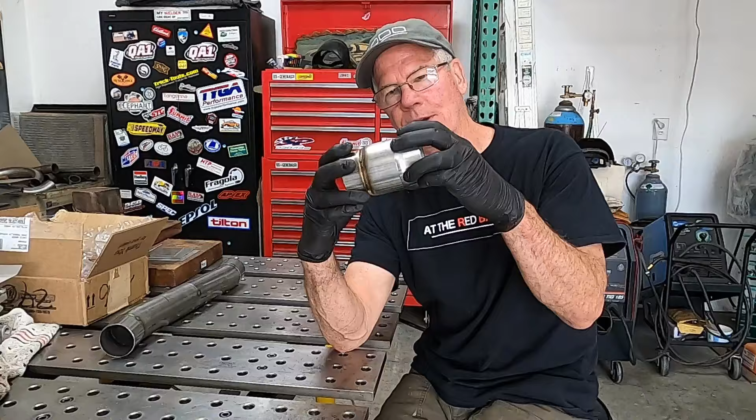All right, we're back to Kudos to Summit. I ordered these yesterday, and they're here today - it's barely 12 o'clock. I mentioned I wanted to run a swaged setup instead of a V-band, and these are what are called double slip. You can see why they call it double slip - it's actually a 2.5-inch tube with an over piece welded here, creating a channel for this bit of swage tube to slide into. So for an exhaust leak to occur, it'd have to go past the inner sleeve, loop back, past this intermediate sleeve, loop back, and come out here. So pretty low probability that these things are going to leak. This is a Vibrant Performance product, and man oh man, it is really beautifully made. I couldn't be happier - this is lovely.

So now it's a question of exactly where they go, and the short version is the farther forward in the car this goes, the better for things like getting the axle out, because I want as little sticking out after the header collector as possible. So now it's just a matter of slicing this up and grafting this in here, and we'll have the next step of this exhaust system taken care of.

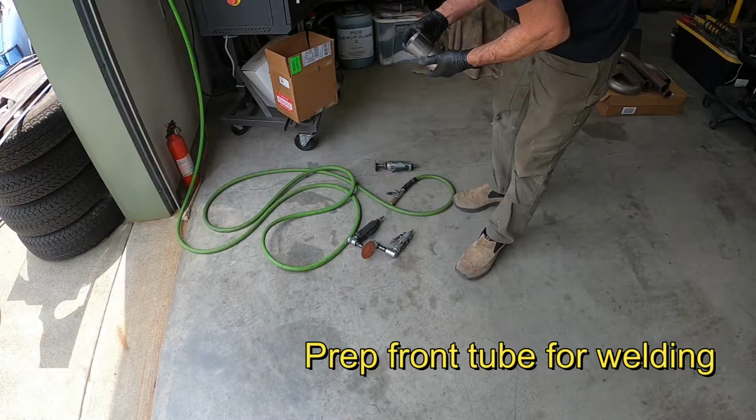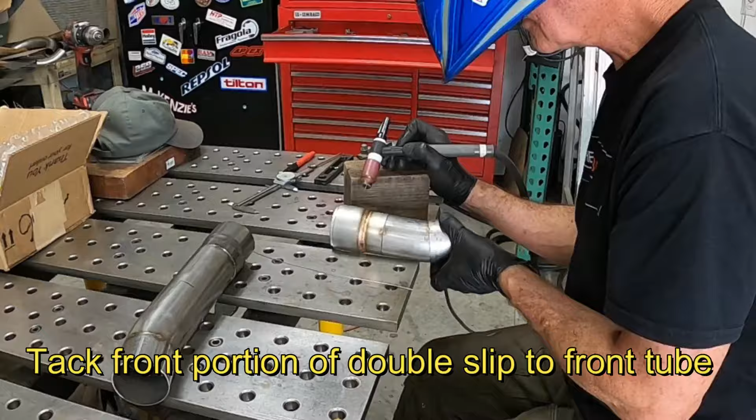Just a couple of little tacks to verify fit, but there is a header side double slip right together, and yeah, there we go. So now let's go see if this fits.

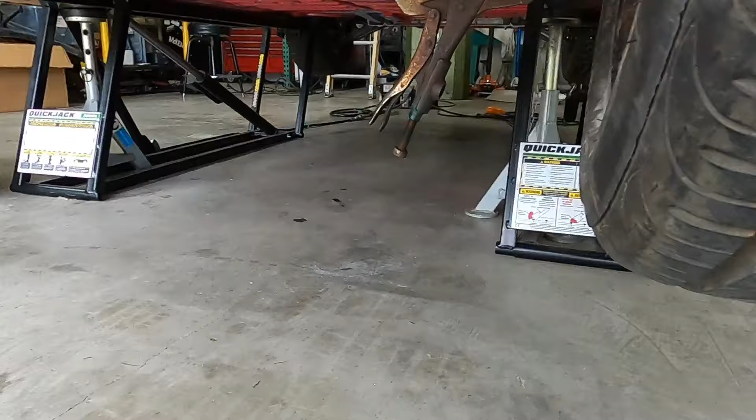That is freaking awesome. So you can see got a great fit at the header. It's lovely - there's no V-band action, which is heavy, etc. And if I take you around here, the money shot is that it's a little teeny weeny bit lower than this, but nothing like a V-band would be. So I like that a lot.

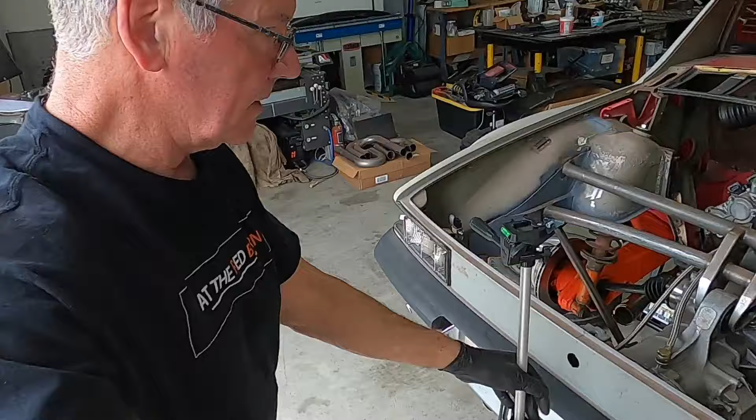So I can now final weld all that, and then start going to work on finishing the other side.

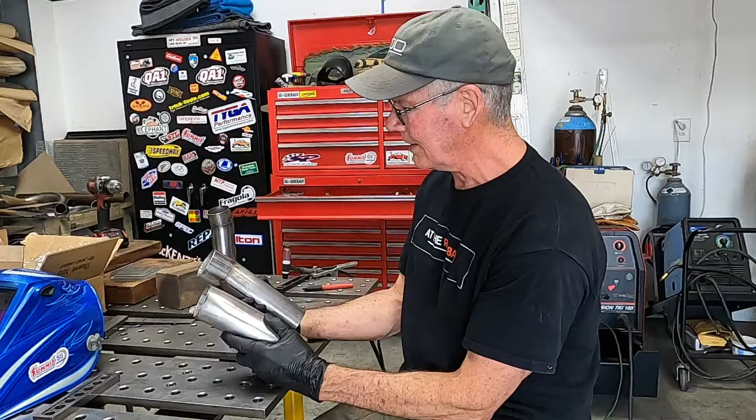Well, changing the design is one reason to have to do things over, but welding the extension on the wrong piece of pipe is a whole other one. So I'm under there trying to get this to fit after it was already in there, and I'm like, why is this not working? Then I realized if you look at where on the radius that extension happens, this is much shorter into the radius than this, even though they're the same angle. What that means is this thing was kicked at a completely wrong angle. And I'm like, this won't fit, this won't fit. Then I looked at it again and went, ah, there's always a reason. So I just got to knock these tacks off, clean this end up, and put this extension on this side - this is the back end, this one goes right at the header. I should have marked them, but lesson learned.

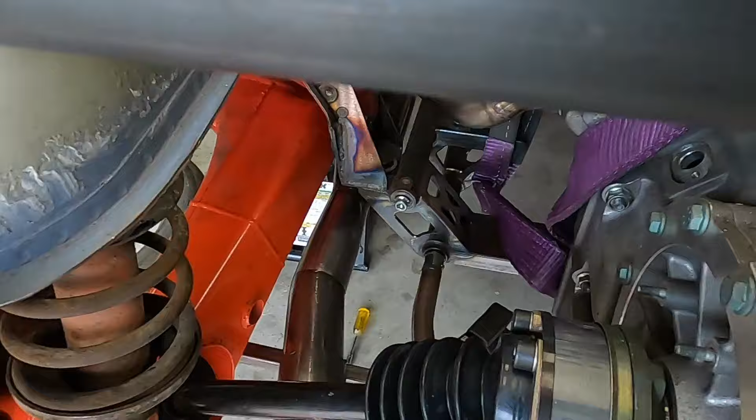Well, that's better. Now you can see that thing is fit really nicely. That was a very scary mistake, because I thought, oh my God, this isn't going to work at all.

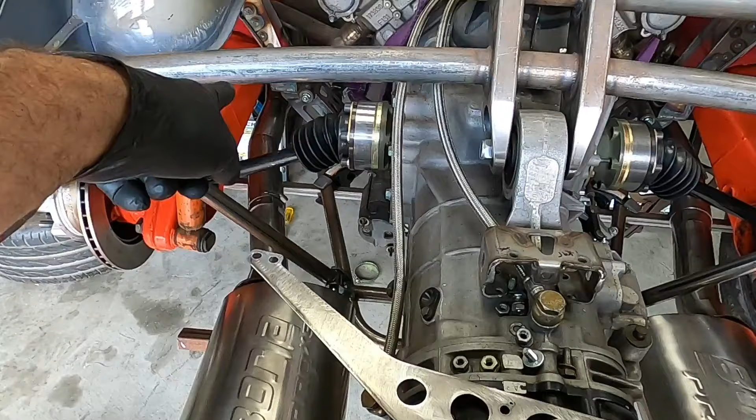But it did. So now, same thing - the angles of these things don't matter now with that slip joint. All I got to do is get the distance right, and they'll rotate into position, like that. It's just the coolest - I really like those double slips.

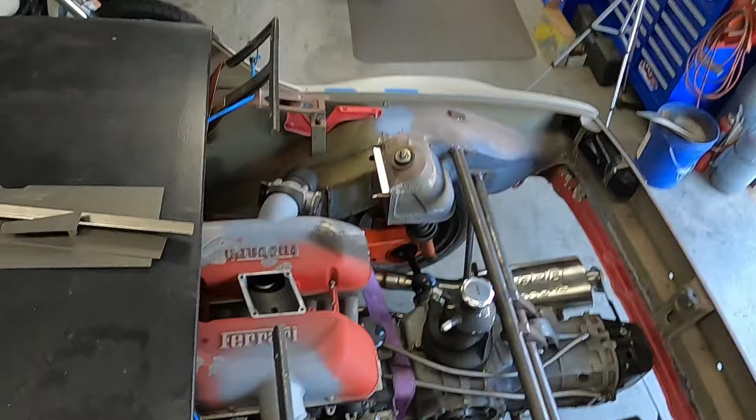All right, there they both are, and everything fits really well. I'm going to climb up my ladder and show you my favorite view of everything now - it's kind of the whole drivetrain. And boy, oh boy, am I happy with that. I think it's looking really, really good.

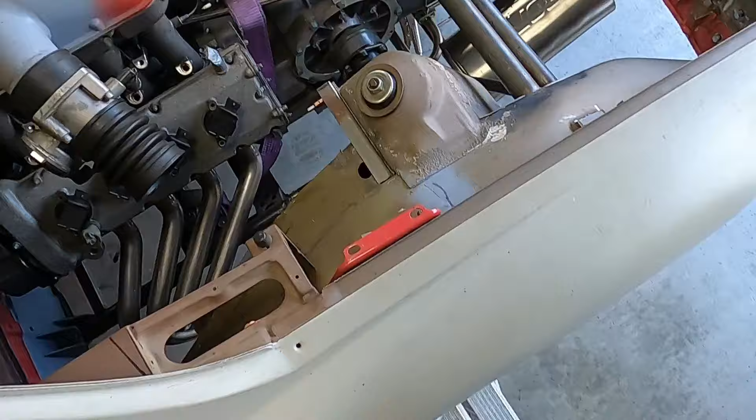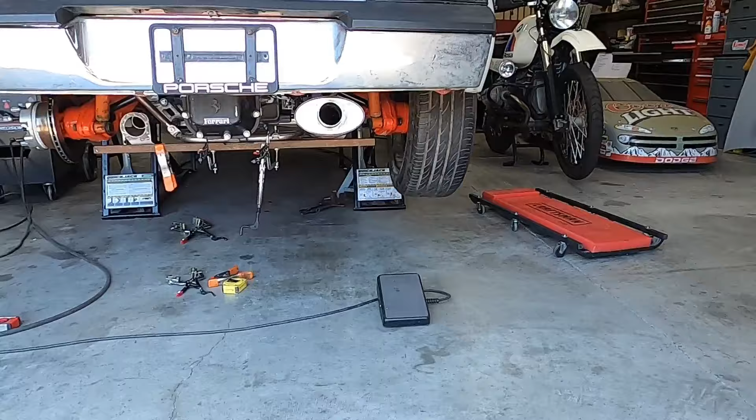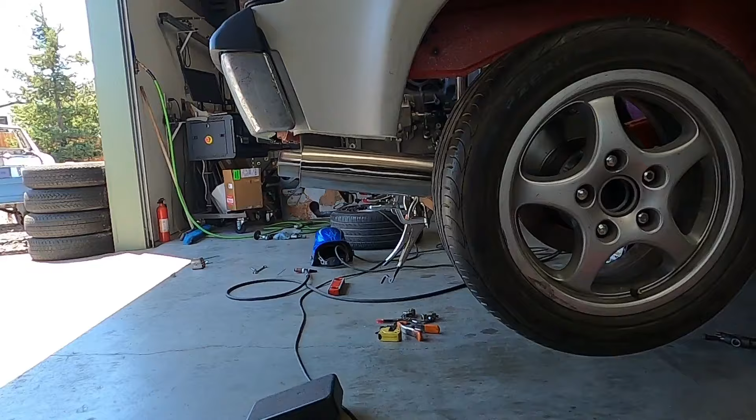Okay, back at it, but I didn't film any of me climbing around under the car, tacking this stuff in place, because it's pretty boring. But for the very first time, no rear bracket hanging there at all, so that's about what it's gonna look like. I think that's gonna look pretty cool, and it worked out. Now there's a little bit of adjustment left, but it really is about the same angle as that corner of the fender. So I'm happy with that, and I think I'll get this side done next to get it to the same state, and then work up the rear hanger. But yeah, happy, coming right along.

We are now seeing for the very first time unsupported headers, unsupported mufflers, no brackets, no clamps hanging down below. That is that. So now to work up a rear bracket.

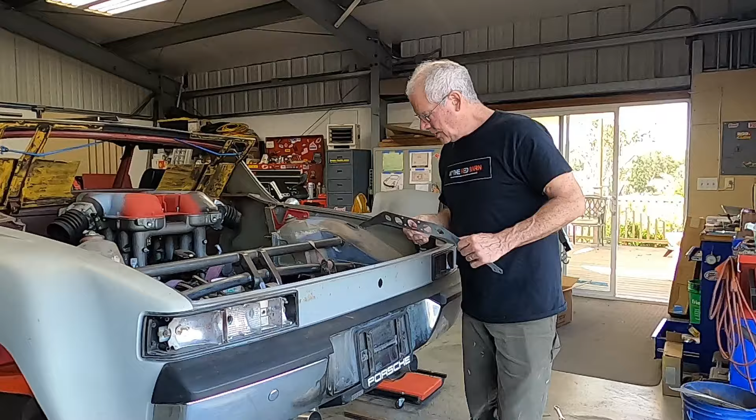So, typical approach, I just come up with a prototype. This is just super thin sheet metal, completely not going to work, but it allows me to get dimensions and position and style and all that other good stuff.

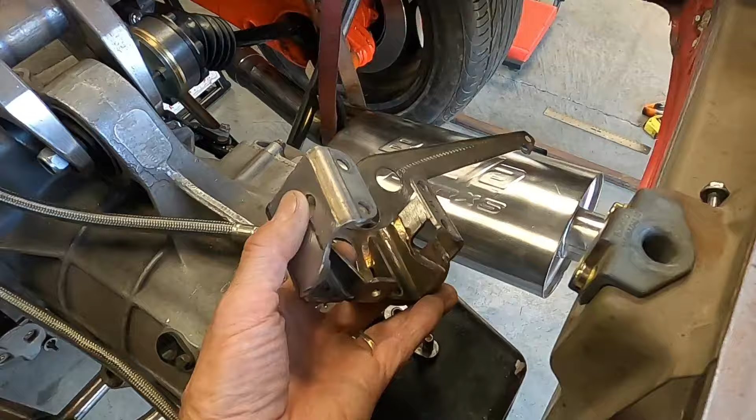Let me show you how this is going to potentially work. All right, this is the factory Ferrari mount, or the basis for the factory Ferrari muffler mount. A whole different kind of setup, but you can see what it does.

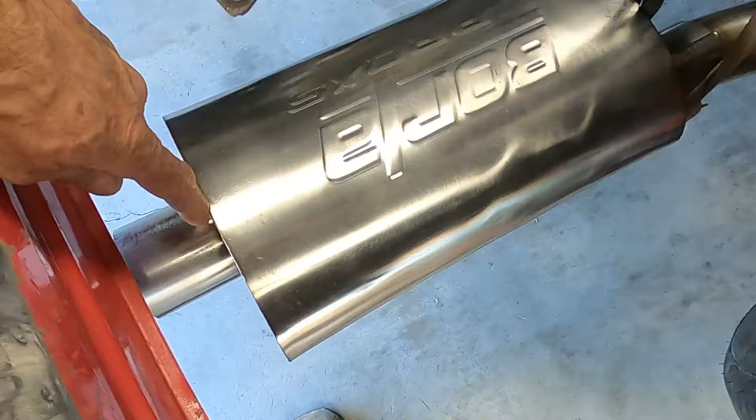I was thinking I might use this as the basis, but it's really big and it's really heavy. One of the other considerations is I have to be able to get the muffler out, and it's welded at this joint, and it has to come out of the slip fit.

So it has to slide back far enough, and the good news, it was keeping me awake last night, but there's plenty of room to get it out, so that's good. But what that means is the tabs need to be fairly close to the actual muffler body.

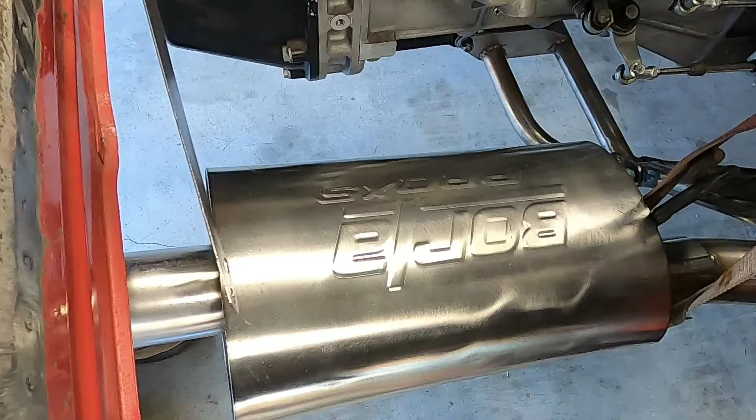So you can see kind of what I'm thinking is this would be something like in here, with a tab that comes up, and the reason for those two bolts is that'll prevent the muffler from tipping out of plane. It'll lock it into a completely horizontal position.

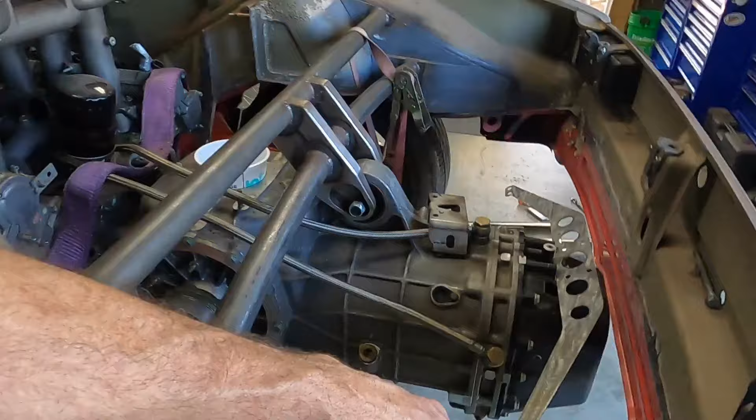I mentioned I was thinking about something that might pick up this curve, but when I started designing in CAD, it ends up being more of a hoop, and it looks kind of dorky. So I think I'm going to go with this look, which is kind of the same shape as the back of the trans. There's angles like this in here. So I think that's going to look cool.

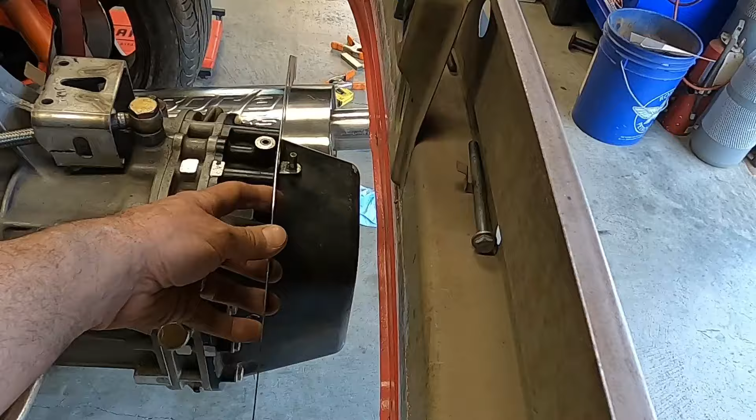It's really just a question of how do I take advantage of the factory mounts and get this back down into here. So we'll see what I come up with.

As I'm getting into this rear muffler bracket, I decided that I was going to refixture the mufflers now that everything's tied down at the front. So I'm going to remake a rear muffler jig.

One of the comments that I got was, hey, that plasma table, what's going on with that? And I realized that even though I've covered this in previous episodes, not everybody watches every episode.

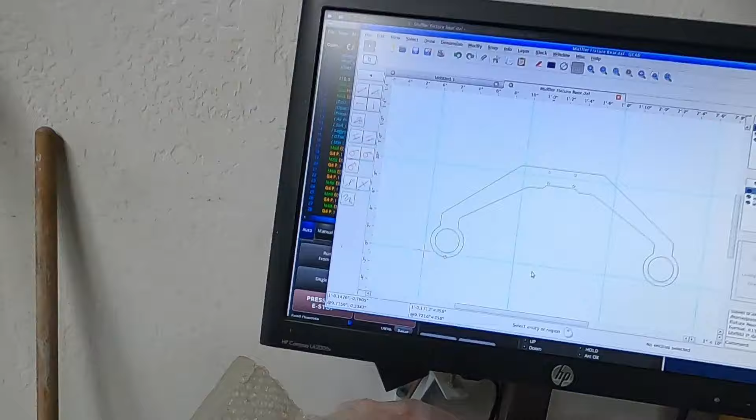So the real quick overview of this whole process is I work up a 2D drawing in this product I use called QCAD. And once I've got the drawing done, that gets imported into a product called SheetCam. This is the system that generates the G code.

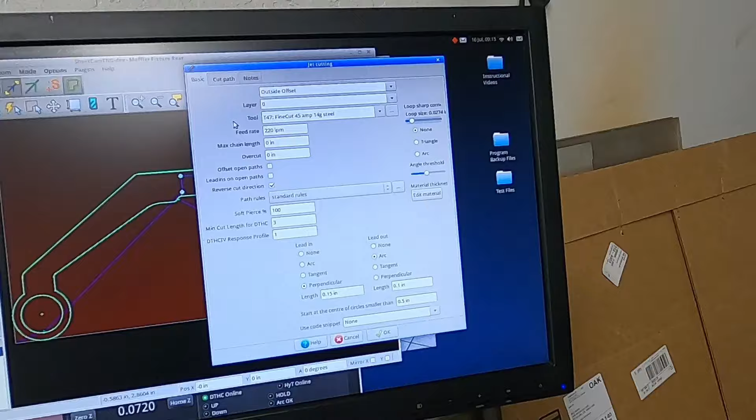It's already set up to do it, but what this has is a series of what they call tools, and this allows you to say what's the thickness of the material you're cutting, what kind of consumables your torch is running, and then this has a bunch of standard settings for things like how fast the torch can travel when cutting that kind of material with that consumable, and what the lead-ins and lead-outs to the cuts need to look like. There's all kinds of configuration stuff that goes on in there.

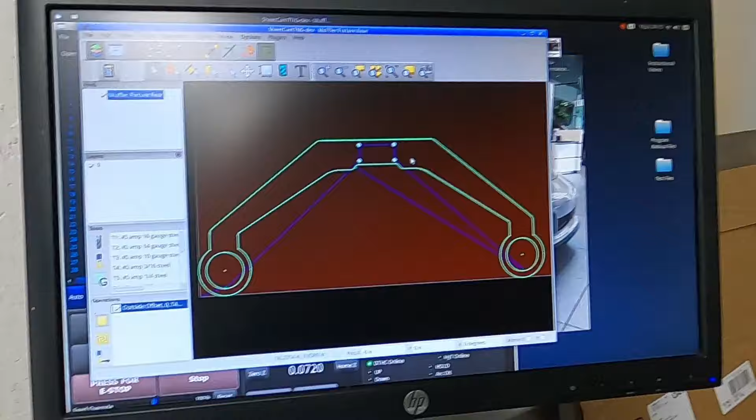And then once you've got this set up, you generate the G code, and the G code is what is actually running the table. This app is called CommandCNC. This is the G code over here.

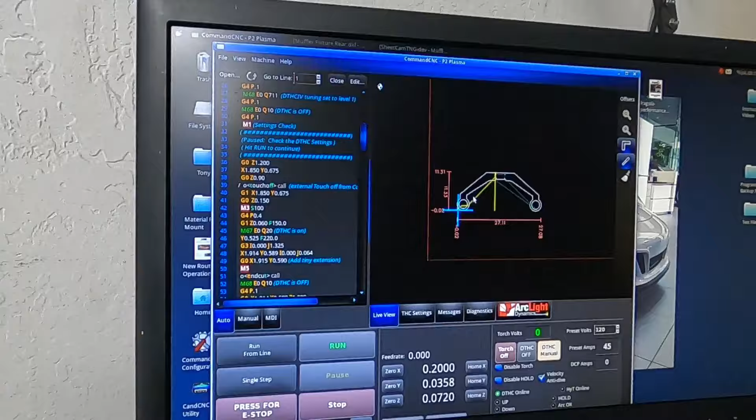And this is the actual system that says, okay, travel to this X position, this Y position, and do this - either fire the torch, or move at this direction, at this speed, blah blah blah. So this is actually the control system that I'm going to use.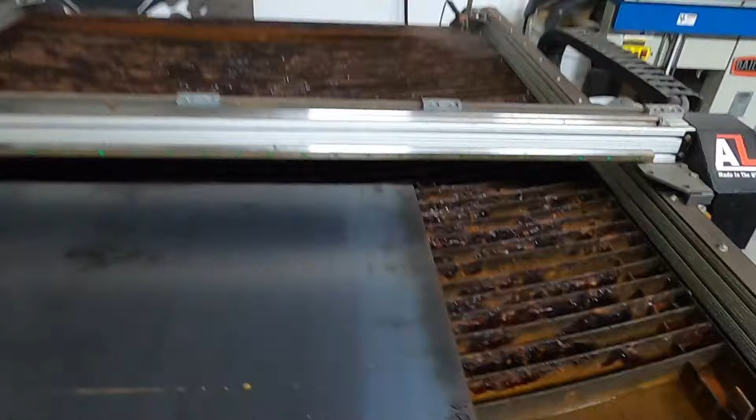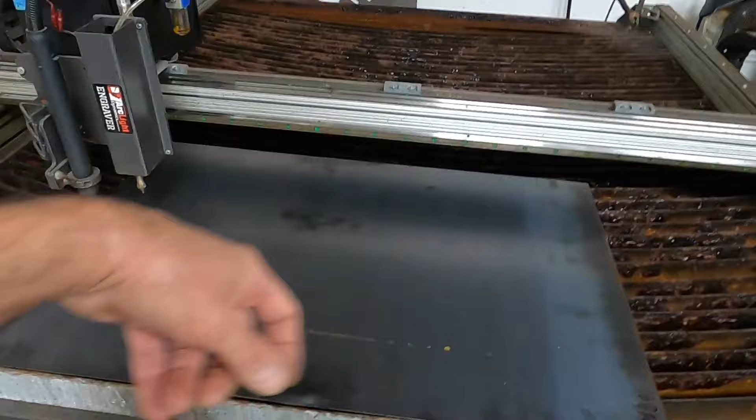I've gone ahead and set up the table. I've already zeroed the torch and I've got it where I want it to be. Pardon me, I'm embarrassed, but the table is so dirty that I need to clean it and change everything out. So I have the water out of it, and I'm just going to cheap out and use the hose to do this cut - just use the hose and follow the torch around. So give me a second and I'll get this piece cut.

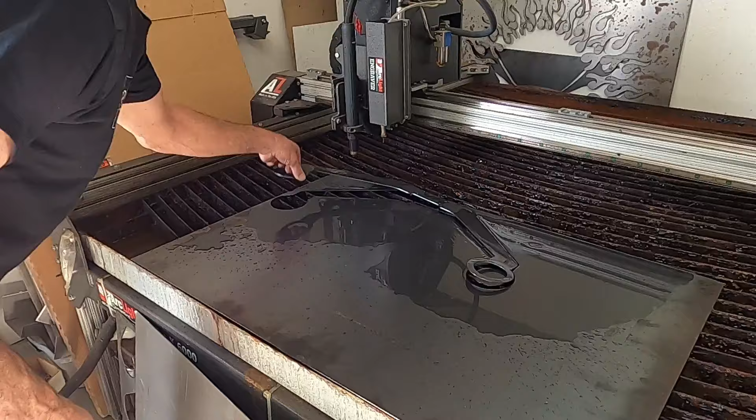All right, and there's that. So let me get this tidied up and clean up these holes, and we'll see how we did. And here's how we did.

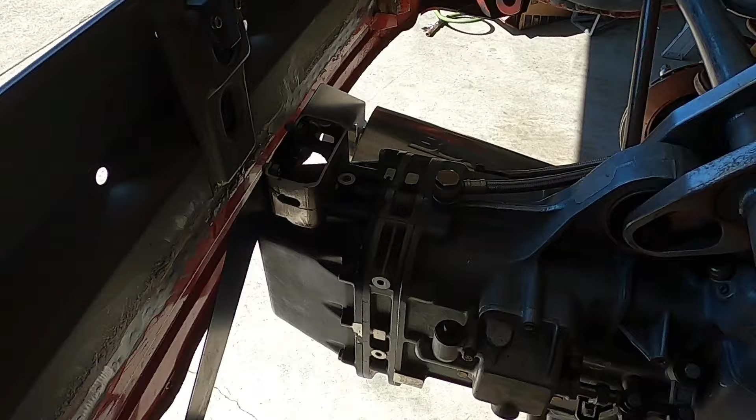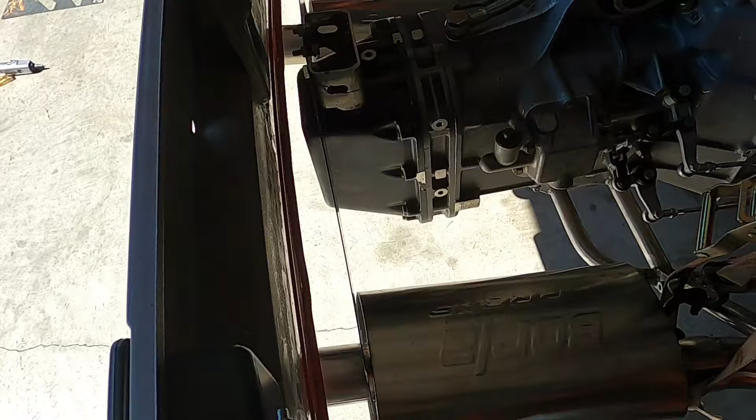It fits absolutely beautifully. The big difference is, the mistake I made with the first version was I used these bosses as the pickup point and ended up having to bend the part. Obviously when you've got sheet metal that's bent, it can start to unbend, so it wasn't really holding the rear ends of the mufflers exactly stable. This one, because it's farther back, it's just a straight shot down, and it actually lines up perfectly.

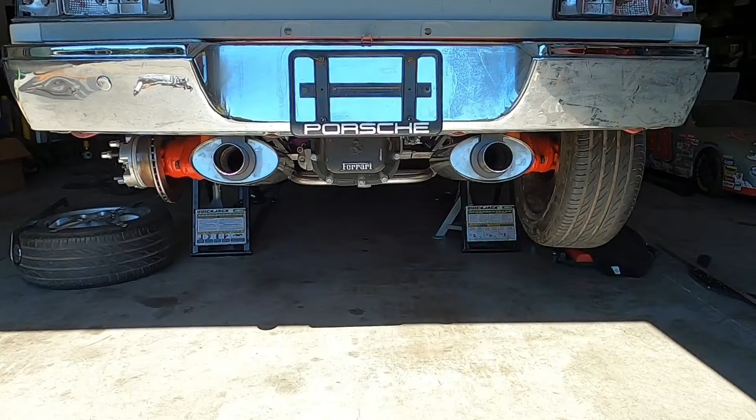Best news of all, pardon me, it's morning time, so I might have some backlighting here, but look at that, it just locates them perfectly. Yeah, there's some slop in the bolt holes, so you can play with that a teeny bit, but the good news is I can get them exactly where I want them to be. So that worked out great.

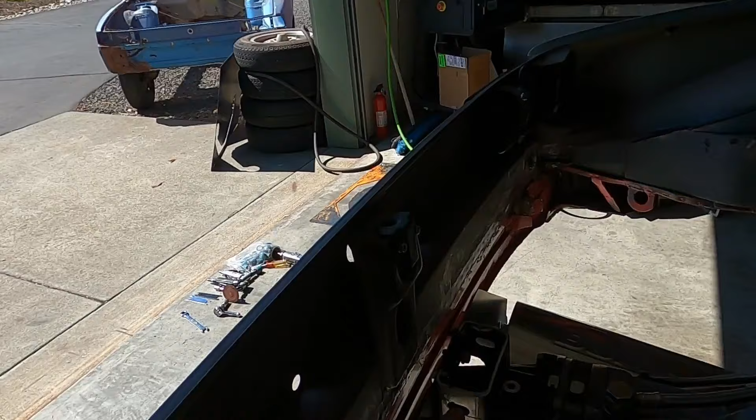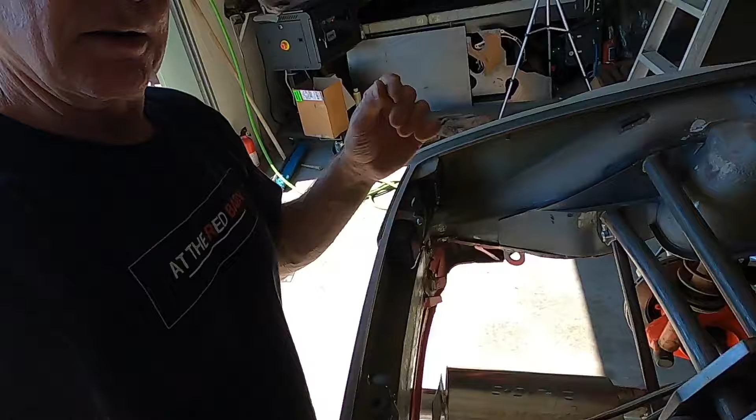Now I have all the dimensions I need, and I can measure up this mount. So everything I do from here on, I know exactly where these tips are going to end up, which is exactly what I wanted. So I can play with design within the measurement parameters of what I now know for sure, and really now it's about style points and how I want to do the connections. So I'm going to go play around with that and see what I can come up with.

Do I look exhausted? I feel exhausted. I've been working on this bracket all day. And here's what I got.

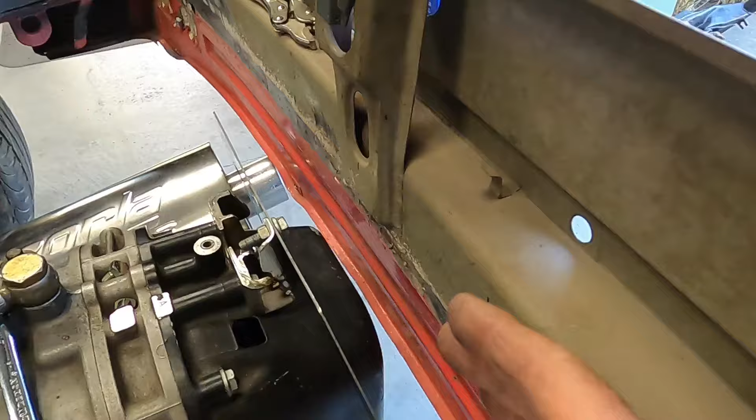As I mentioned, I didn't like this Ferrari mount bracket thing because it was too bulky and too big. And as it turns out, as much as I was saying, hey, look at it, it puts that bracket hanger, that fixture, right in line with the mufflers, well, except it didn't put it at the right angle, which means this was never going to work.

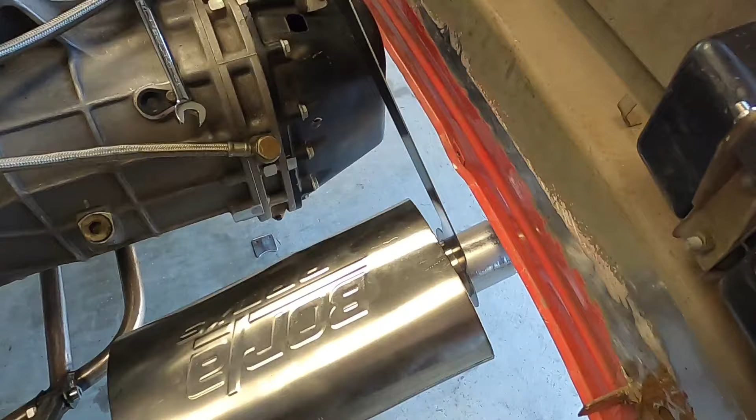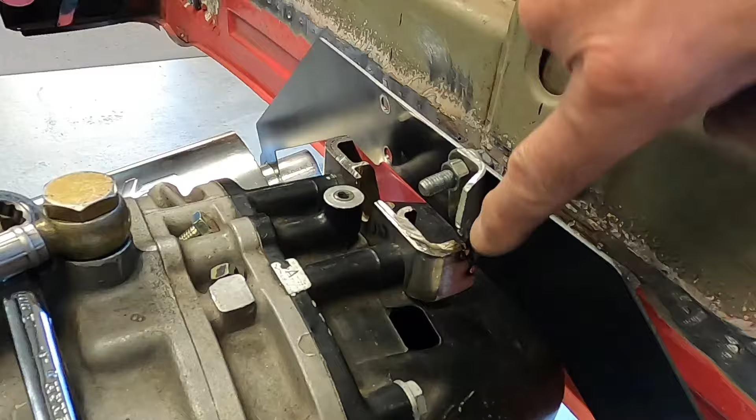Rather than try to tip a bracket down here, which just fell, I decided, nope, I'm going to abbreviate this bracket. So I think you can see what I did. I cut it all to pieces, kept the base mount where it was, and cut the part that held the muffler bracket and moved it forward and at the correct angle so that when it drops straight down, it ends up right where I want it on the mufflers.

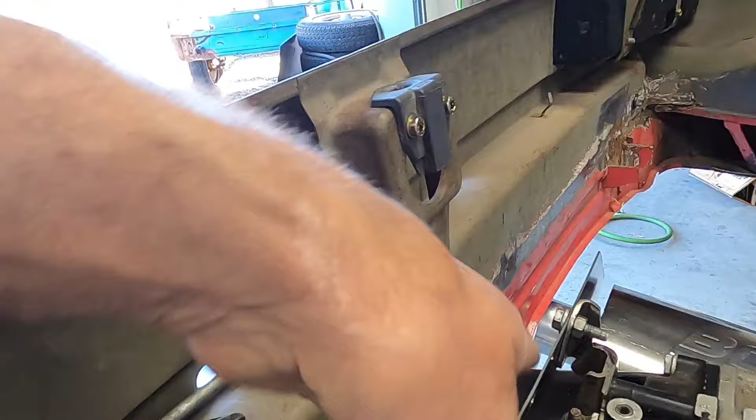I've got half of it done, and now I got to match the other side and make sure everything stays straight and in plane.

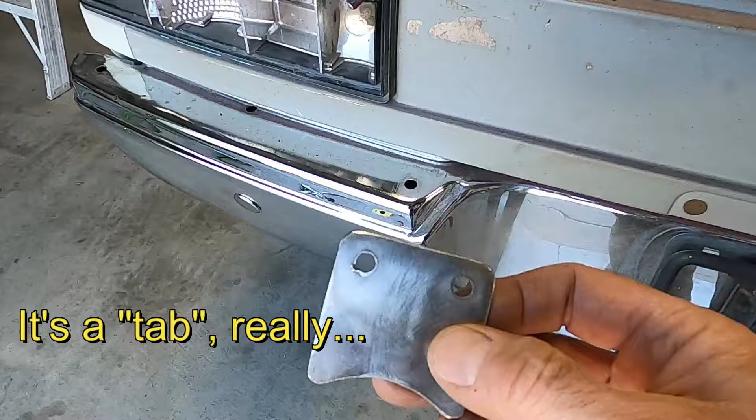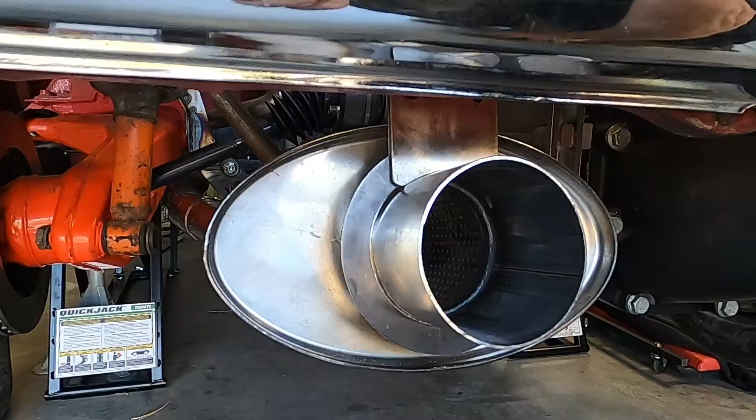As I mentioned, what fell to the ground was the muffler bracket, or the bracket that goes on the muffler. So this, if I slip it in here, it's going to sit like that, and that'll get welded directly to the exhaust pipe, exhaust tip, and tie up, and you can see it's going to tie right up onto that bracket.

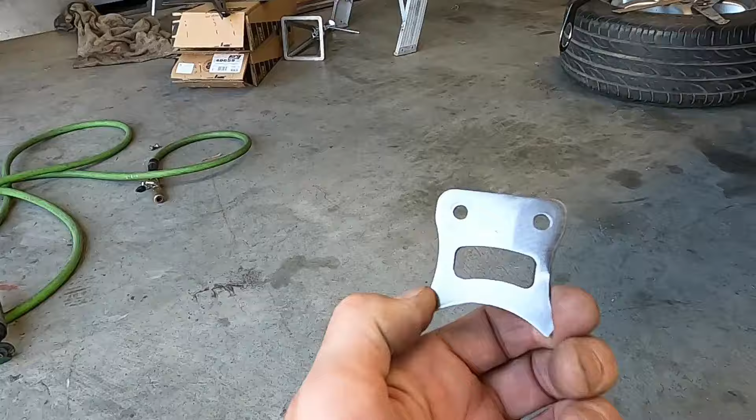Now obviously this ring's not going to be here, but I started playing with that, and then I thought that has no style points at all, and we can't have that. So I made this, a little screaming man face who's frightened, because who wouldn't be frightened in this car? But it's going to be one of those you got to know kind of looks, because it's just going to be this super cool looking bracket that hangs out right there.

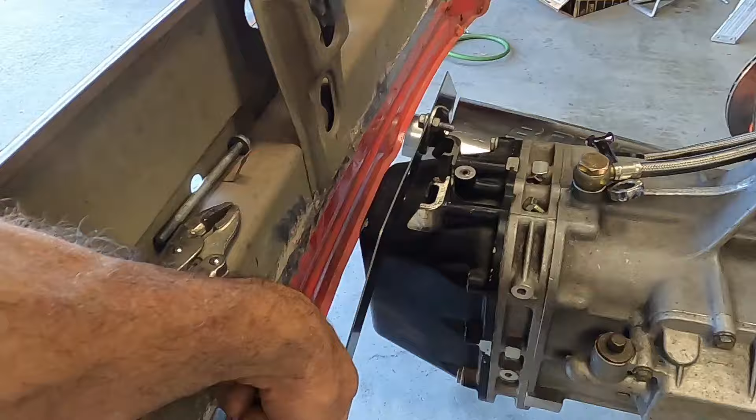So this is what that's going to be. And the nice thing about it is I can now either cap it, do like a T structure on just sheet metal here, or thicker sheet metal than this, or I can do a box structure by making two of these and putting a cap on it or something like that.

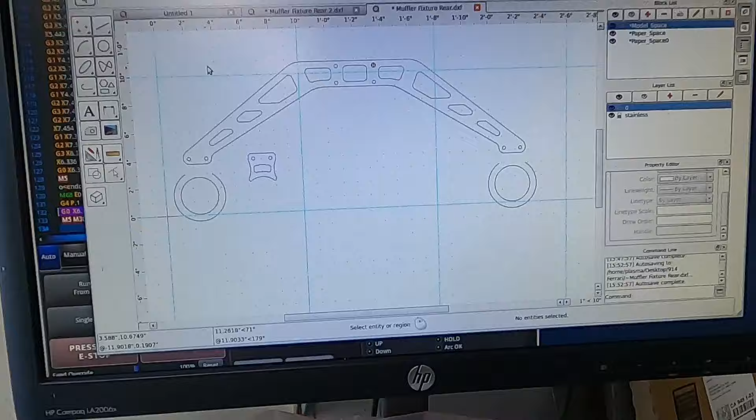That bracket is what we've been playing with all day, but here's the CAD drawing of what likely will be the bracket. You can see kind of what I've gotten up to, I'll just paste this over. I'll show you how I actually do this.

I move this stuff around on the drawing, and this is just an example. But here's how I come up with the shapes and the specs and the dimensions, right?

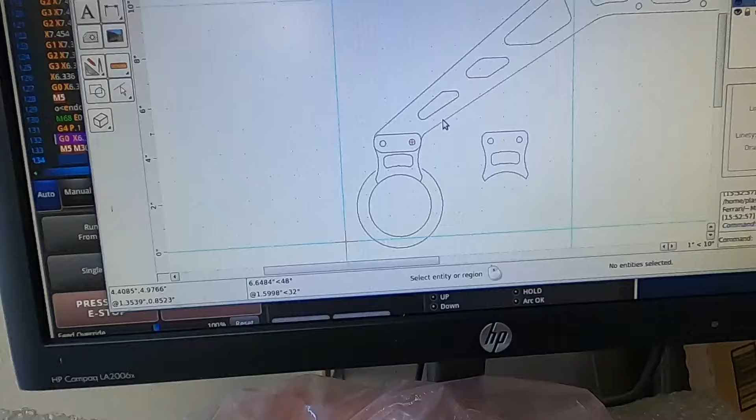So I started off with that bracket drawing that you saw me use that's in the car right now, and then I just reshaped where I want the bracket to end, and then I shaped where I wanted the muffler bracket to be. Having those holes be coincidental in the drawing means that when I make that and bolt it to that, it's going to locate right around that exhaust pipe, and it's going to keep everything exactly where we want it.

I think I'm just going to spend the rest of the afternoon trying to finish up this mount, and that'll free me up to then know exactly what I have and where it's going to end up when I go to make that hanger bracket. So back to it.

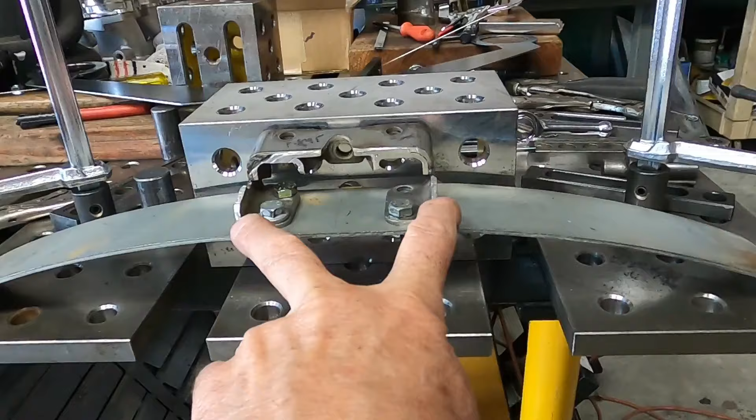Well, after all that, this is the fixture I finally came up with that worked. I used the original Ferrari mount, pinned these things down, the little cut-off corner components, and then centered that, got it leveled relative to this level, and got it tacked on. So, I think that's it. I'm gonna go fit it again and see how it did.

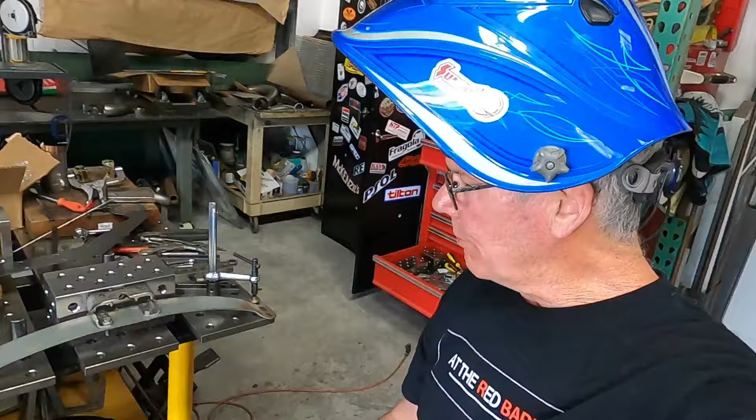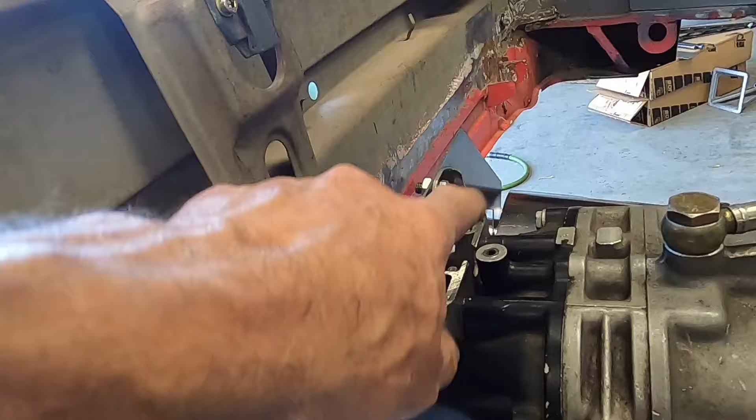It worked! It worked great. Look at this. Now, obviously, it's not pretty yet, but this will be easy enough to just make a couple of little fill pieces and shape a couple of these other areas to make that work. But there's what I was after. It tips at the right angle.

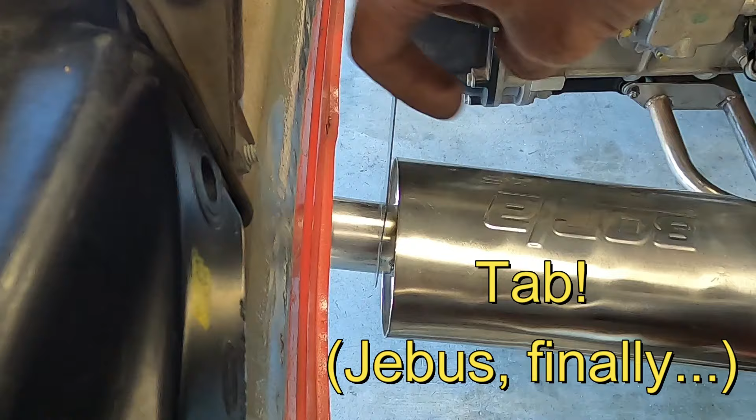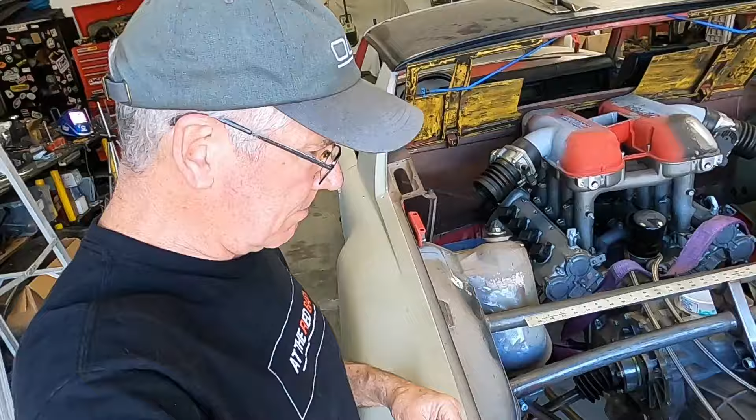To get the bracket right where I want it to pick up the tab that's going to be pretty close to the muffler. So, yay. And it doesn't look, I mean, obviously you got to squint to make it mint, as I've said. But when this is prettied up, and maybe painted black, it'll probably disappear. But I think that is going to be really nice. It doesn't look like this big giant metal box anymore. So I'm calling that a success. And now to tidy that up and get to work on the actual bracket itself.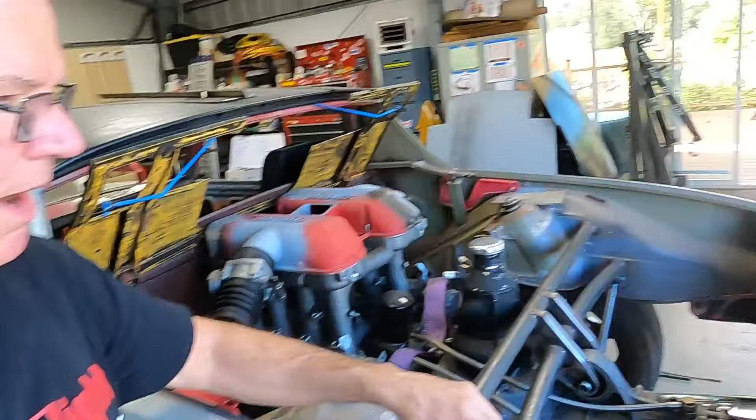So after a bunch more work, here's the greatly abbreviated mount, and it still keeps things in the same plane. But I cut this piece off and shortened everything. Martin came by yesterday and we were talking about this, and we agreed that the lower that got, the less bulky the entire bracket would look.

And so this was shortened, and everything else is the same, other than, you know, it's prettier now. It still needs a bit of tidying up, but this is the latest version of the muffler jig. You can see, I just knocked, I don't know, 3/8 of an inch off of the height. Not that it's that big of a deal, but every little bit helps when you're getting into trying to make this thing look small. And oh boy, I'm going all in on making it small.

After thinking about this some more and playing around with a couple things, what I realized was if I took the bracket, and this is the latest design, so I'll talk about that in a second, but if I took the bracket and just let it fall all the way down till its top hole was in the bottom hole of the mount, it moves everything down a whole bunch, and I don't even need those top tabs. Those 2 bolts are going to be plenty to hold that thing in there.

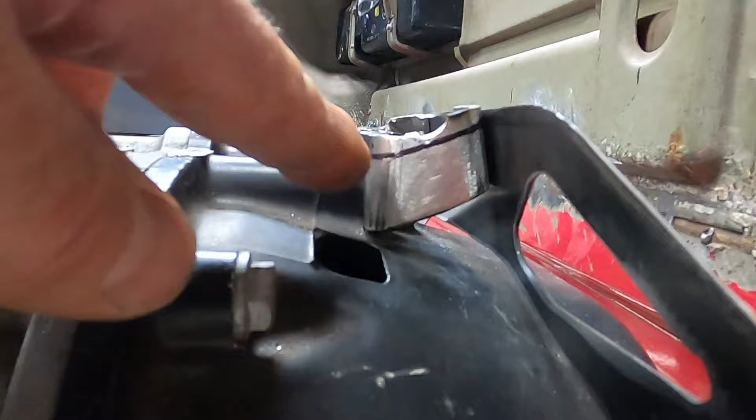And you can also see that I've got plans, if this little Sharpie line, this is just a flanged bolt that goes all the way through and threads into the transmission case up here. So I have to be able to have that same bolt in there. But I only need as much space on this mount as is needed for that flange to get purchase. So I can cut another, I don't know, 1/4 inch off the back of this thing, and then I'm going to angle it up until it just gets above the same situation here, so I got enough purchase for these fasteners. And this thing's going to be teeny.

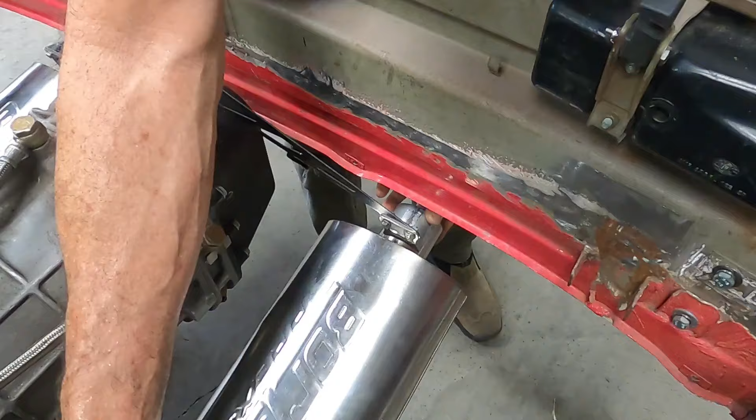And, you know, I was all worried about how to get these mufflers out. But remember, I've got the double slip at the front, and I was worried about these having to pull straight out. Well, remember, I have all these lovely angles in here. So what I was verifying is with this bracket here, I was thinking, oh, I'm going to have to change these dimensions and get this way up here. But as it turns out, if I, with this disconnected, if I rotate the muffler around the slip joint, it just rotates down and out it comes underneath the bumper. So I don't need to worry about the distance back for where that tab goes. And when I put it back in, as you can see, it goes in and it rotates up into place, and we're back where we were. So that's going to work out super well.

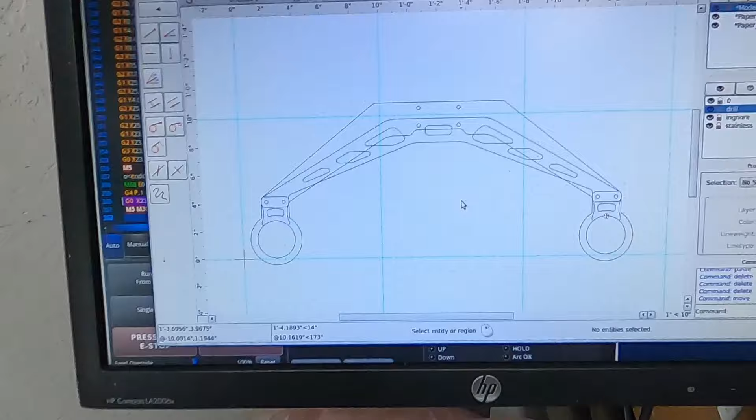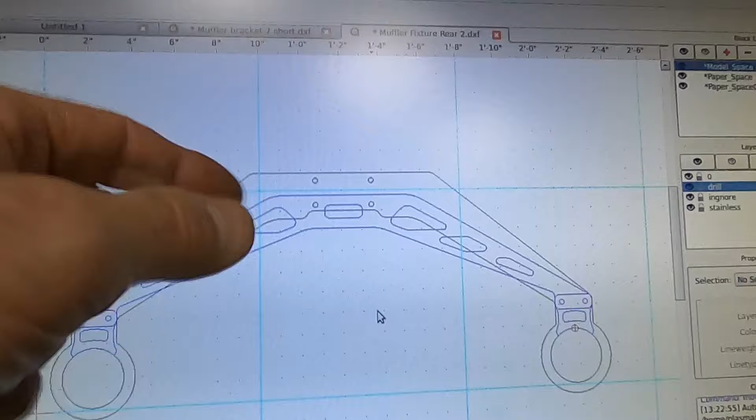All right, then I mentioned the new bracket, and here, maybe a little confusing. The black line is this big outer upper line, and the exhaust tips and exhaust rings, that's the muffler jig that I've been working with. You can see here that the bottom holes of the muffler jig have become the top holes of the bracket, and you can see the dimensional differences in where I started and where I ended up by lowering things. And yeah, it's much closer to the transaxle case, but isn't that better? I mean, it's less material, it's sleeker. So that gets you current with the saga of the muffler bracket.

I was hoping to get farther, but typical at the Red Barn, this process means multiple iterations of stuff and things taking longer than I originally thought. But I'm really happy with how this is proceeding, and the goal is to make that thing as small as possible, and it's getting pretty small. So I'm happy with that.

I will say that Martin has been on me to start from scratch with the design for that mount, one that doesn't use any of the factory Ferrari part at all. Now that we know exactly what we need, we could probably come up with something even sleeker and cooler. But I don't have to do that to keep the build going forward. I may come back and revisit that as a separate sub-project.

But for now, I'm going to continue on with this and move on to other stuff that's actually going to get the car running. So again, that's going to do it for this episode.